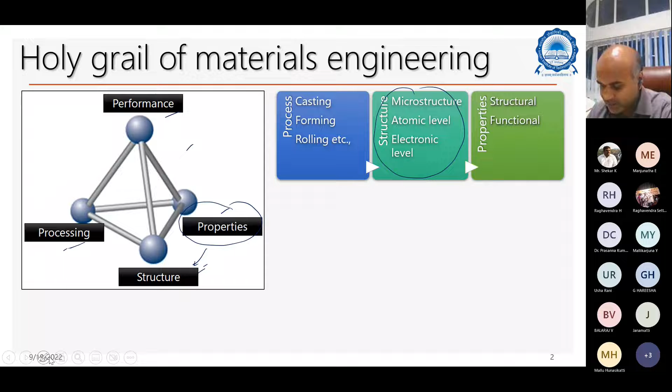What I mean to say is that when I say microstructure, the objective of materials engineers is to get a broad hold of this understanding - this tetrad. Typically mechanical engineers, material science engineers, or design engineers want to have a detailed hold on this materials tetrad, so they'll be able to design new materials and so on.

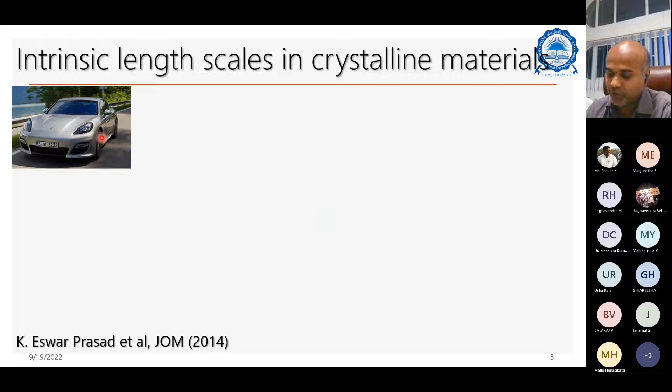So if we look at the intrinsic length scales of the material - let's say you're talking about an Audi or a car, like a Porsche, and then you talk about the cylinder block, cylinder head, crank casing, or whatever different components you can take out of it. This is what you typically look at in a macroscopic sense.

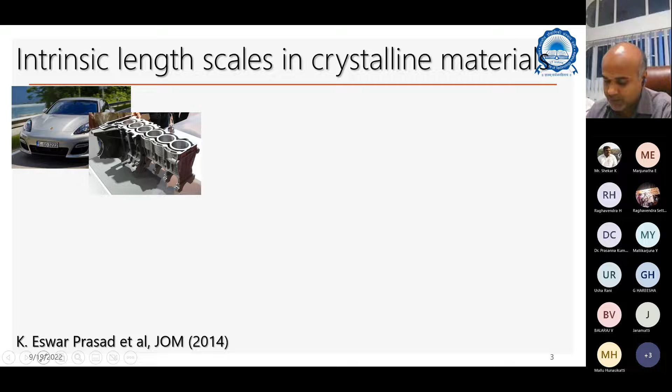When I say dig deeper into a small region of this vehicle, this engine component, and look at it under an optical microscope by using certain operations called metallographic sample preparation - which involves polishing followed by etching - what you see are different features which you could not see with the naked eye.

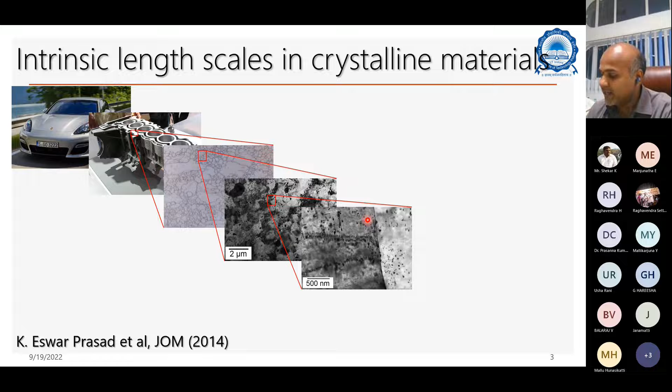If we dig deeper further, coming down from 2 microns to 500 nanometers - one order of magnitude lower - I can see a clear grain boundary, and I can also see certain features important for mechanical properties called dislocations, which are one-dimensional defects in materials. Dislocations can get blocked at the boundary to enhance the strength of the material - this is called the grain boundary strengthening mechanism.

You can further see that these boundaries are still there, and the particles appear bigger and bigger - not because they've actually grown, but because you're magnifying the zone, which is why you see a bigger apparent size of particles. This image is taken using a technique called transmission electron microscope.

In a nutshell, what I want to say is whatever alloying elements you're adding—let's say nickel and chromium to a steel—what does the nickel do? Nickel increases the strength of the material, and chromium increases the corrosion resistance. What exactly they do is sit inside certain specific regions of the structure, and they improve certain mechanical properties.

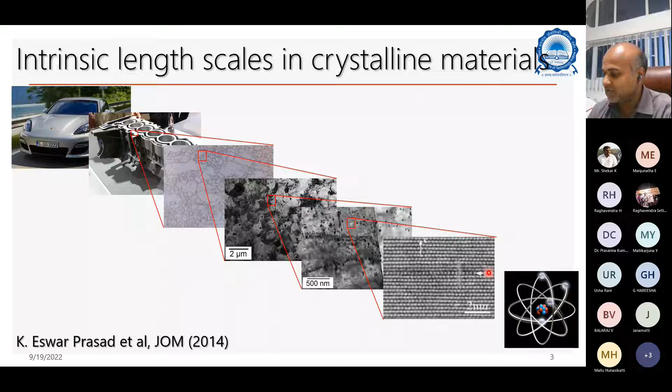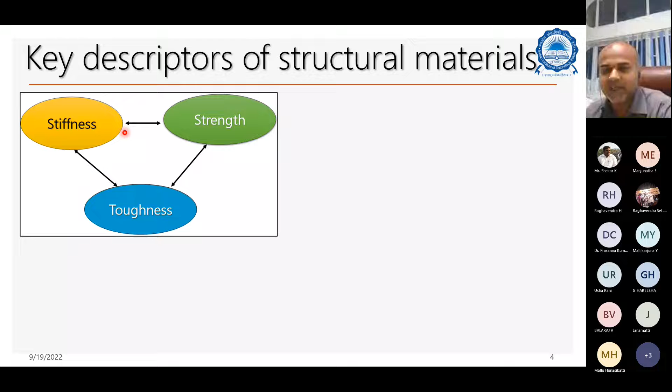So if you look at the key descriptors of a structural material, there are stiffness, strength, and toughness. These are the three important properties we always work on. All mechanical engineers or design engineers work to increase the strength of the material, and also to increase the toughness of the material.

Toughness means, for any critical component, you want the fracture toughness to be very high. But let's say you talk about a typical concrete pillar—you don't require toughness, you require very high strength for that, so it doesn't exhibit any plasticity.

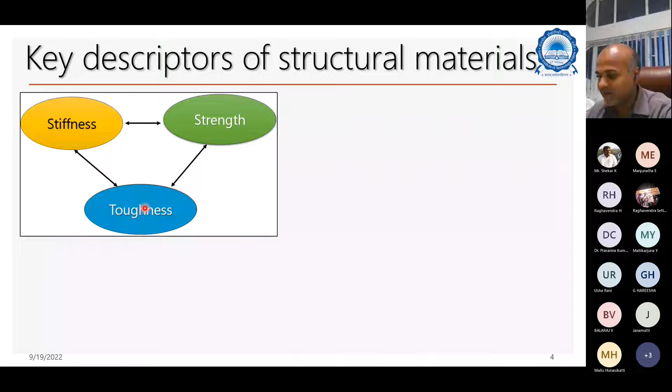In conventional materials, there's enough theory proposed and enough work done to understand how you improve the strength and how you improve the toughness. Again, this is done by processing, by certain processing methods.

What I'm talking about could be strain hardening—you take a material, you beat it extensively, and then it becomes harder and harder. That is called strain hardening.

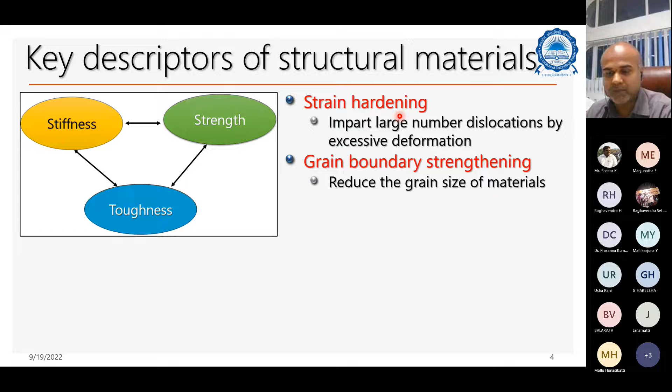What I'm saying is you cannot do this with additively manufactured alloys right now, because you're directly making the end component. That's why you have to figure out how to incorporate these strengthening mechanisms into additively manufactured alloys—this is a critical problem people are working on right now.

And grain boundary strengthening, as I showed you before—decreasing the grain size will impede the motion of these dislocations and affects the strength of the material. That's where nanocrystalline materials become very popular, as opposed to microcrystalline or millimeter-scale materials.

In nanocrystalline materials, you have a large number of grain boundaries for a given area, and these grain boundaries impede the dislocations. That's why they increase the strength of the materials. That's typical grain boundary strengthening.

Most of you would have heard about Hall-Petch strengthening. It is another term that's been coined for grain boundary strengthening.

And solid solution strengthening—this is what you're talking about. Let's say you add certain alloying elements, and these deliberately get seated in certain places, which is processed by rod processing or heat treatment processes. Then you can increase the strength of the material.

That's typically done in conventional subtractive manufacturing components, where you do all these operations and at the end machine it to make a finished product. Whereas in additive manufacturing, you start with the product, so you cannot do any of this.

Except that people are working on how to incorporate it through certain hot pressing methods or heat treatment methods—how you can post-process these additively manufactured products to improve these properties and so on and so forth.

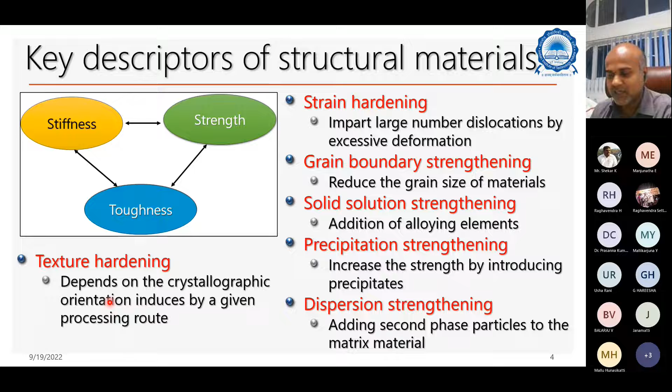Dispersion strengthening is another mechanism, mostly used by people working in dynamic energy applications. This is called texture hardening, another mechanism by which the strength of the material is improved.

So what I mean to say is that these are methods that have been in practice for more than a century, how you can increase the strength of the material, even though the mechanism has been understood only lately.

All these process methods are done before making the final component itself. So look at this, the process flow of subtractive manufacturing, SM. You have melting and casting of the alloy, and you have wrought processing.

Wrought processing is also a very important processing step in subtractive manufacturing, which we'll discuss in a few slides to set the ground for the challenges faced by people working on additive manufacturing processes.

After wrought processing, people do heat treatment. Most of you would have seen normalizing, annealing, and so on and so forth. All of these are called heat treatment processes.

And followed by you machine the component to the desired shape, and then the finishing operation. The finishing operations could be shot peening, or any other painting and coating.

If you go back to additive manufacturing, the most important part here is powder making. We'll stress upon powder making in today's lecture, as it's a very important process which dictates the quality of your additive manufactured product.

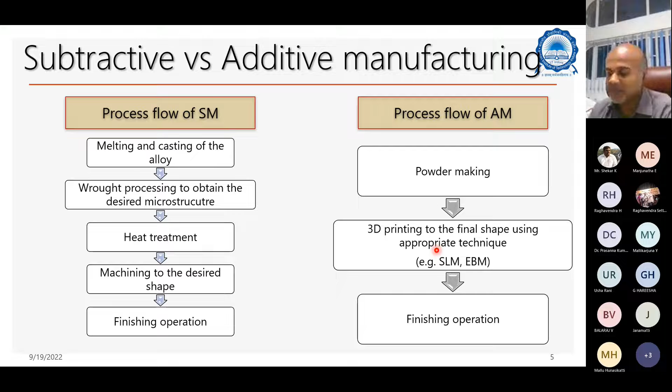Then the traditional understanding we have, how can you translate that to additive manufacturing, is a challenging process. If you look at subtractive manufacturing, standard thermomechanical processing windows have been developed. I'll briefly touch upon these processing windows in subsequent slides.

This has been in practice for quite a long time to obtain the desired microstructure. This is very important, to obtain the desired microstructure, unlike other materials, additive manufacturing material, which dictates the mechanical properties.

Most AM studies are focused on obtaining a microstructure similar to wrought alloys, because whenever you are trying to convince an aerospace engineer, you say the microstructure made through additive manufacturing is similar to that of subtractive manufacturing, then there's a chance of convincing them.

Despite that, towards the end, if time permits, we'll see a case study by the aerospace industry where there is a critical issue - people are not trusting some additive manufacturing products because there are still many things to be understood. Commercial industries are very conservative, hence they do not take the risk of directly replacing wrought alloys with AM alloys. We'll see this at the end if time permits.

The most important component here: conventional bulk manufacturing methods like casting, look at the cooling rates. Whenever you take the liquid metal and try to cool it down to room temperature, the cooling rate is very low, in fact at 10 power 0 to 10 power 2, around 100 K per second, which is pretty low.

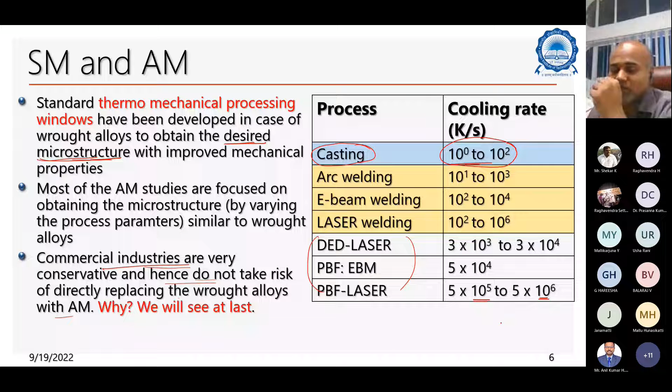In slow cooking, you're actually under equilibrium conditions, so whatever you're cooking soaks up well. Whereas in fast cooking, it doesn't soak up well - the surface gets softer but the core still gets harder.

So what happens is that whenever you're cooling a material, you have to ensure that the temperature is uniformly cooled throughout, so that the properties at every point should be the same. That's the objective of any engineer.

Since in casting this isn't achieved because of the cooling rates, even at cooling rates of 10 power 2, you generally do a process called wrought processing.

The wrought processing could be a forging operation, what you typically see in industry. I think you're going to visit Jindal as well - I've seen one of your schedules for next week. So there you tend to look at many of these forging operations or wrought processing operations of steels.

And then rolling operation, which most of you know, where you take the material to high temperatures in both cases, and then forge it or roll it to obtain the desired microstructure.

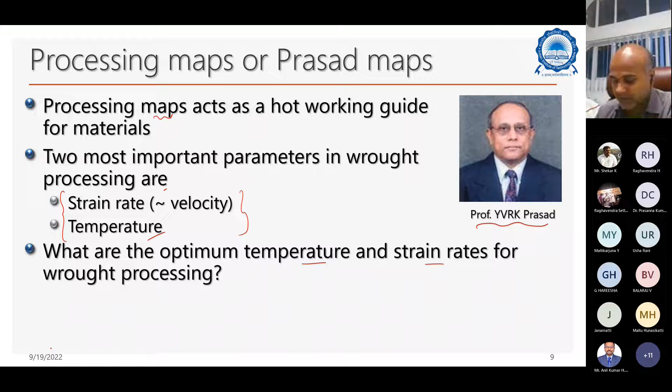So at what temperature, if this is a steel, should I forge it? Let's say - is 1000 enough, or is 2000 enough, or is 1200 enough.

Which temperature should I forge at? There's a melting temperature, beyond the liquidus temperature, 2000 or so. I'm talking about 1200 or 1500. Which temperature should I forge at?

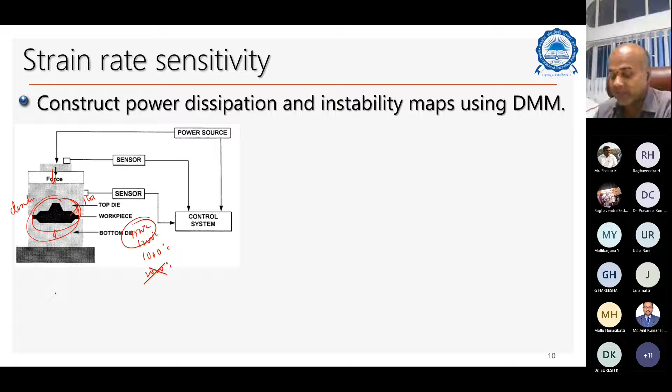Similarly, what rate should I forge at? At what velocity should I hit this? The velocity is one way related to the strain rate. The velocity divided by the length of the component gives you the strain rate. Velocity and strain rate are analogous to each other.

Typically, what people do is construct certain maps using dynamic materials modeling to arrive at rules: what is the optimum temperature and what is the optimum strain rate that a material should be deformed or wrought processed at, so as to arrive at a desired microstructure.

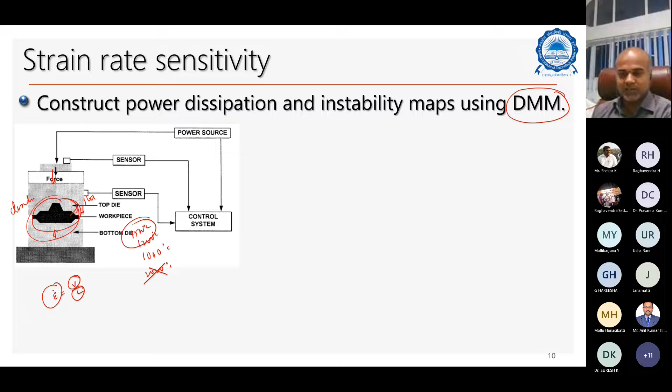So look at it here. What people do is take a small sample, a piece like this, and deform the sample at different temperatures. Let's say these are temperatures 200, 250, 300, 350, 400, 450, 500, 550, and 600. These are different temperature rates you're trying to do that at.

And then these are the different strain rates. This corresponds to certain velocities. V1, V2, V3 — these are different velocities in increasing order.

So what happens is that when you do that, materials tend to exhibit a property called strain rate sensitivity. The moment you increase the hitting rate, the material exhibits a higher flow stress, because of the character of the dislocations — that is what the mechanisms tell us.

So at a given temperature, if you increase the velocity, your flow stress goes up. The flow stress increases with strain rate. Sigma increases as epsilon dot increases. Epsilon dot means the velocity I'm talking about.

So what Professor Prasad has done is derive and compute, from the dynamic material modeling — I'm not going much deeper into that — the efficiency of power dissipation. If you talk about any method or process...

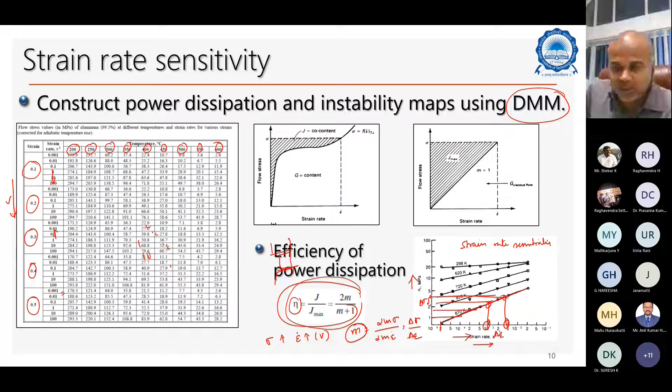From the strain rate sensitivity, you should be able to calculate the efficiency of power dissipation — how much energy the material has dissipated. If it is dissipated more to the surroundings, less is consumed within itself; if less is dissipated, more is consumed internally, causing internal microstructural changes, which you will see in the next slide.

Similarly, there are certain instability parameters. So efficiency of power dissipation is one thing, and what changes the material undergoes when it consumes this energy is another — it could be a good change or a bad change. If it's a good change, it gives a homogeneous microstructure; if bad, it gives a heterogeneous microstructure.

So similarly, you construct a power dissipation map — these maps can be generated, and an ASM handbook is also available on this. You also generate a map called the instability map. Superimposing one on top of the other gives you this kind of processing map. This processing map tells you something, but it's a simple concept — you don't have to worry too much about it.

So what happens is that if your temperature is this, and if your strain rate is this - this is the range of temperature and range of strain rates or velocities I'm working with - then you'll get a very good microstructure in the material. I'll show you what is good microstructure and what is bad microstructure in the next slide.

Suppose your temperature is this, your strain rate is this - this is your window. Then you get a very bad microstructure. Bad microstructure means the material properties are highly non-uniform. You don't want any operation to be carried out in this domain.

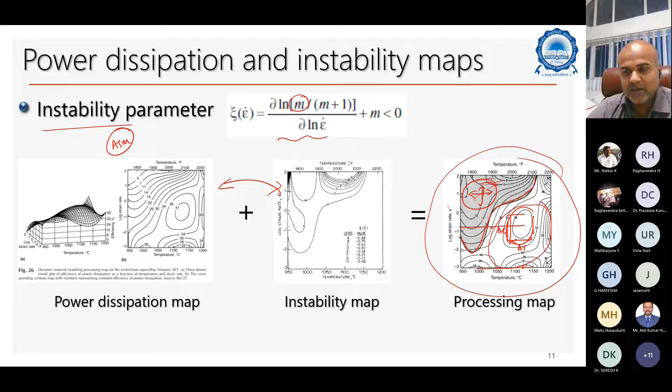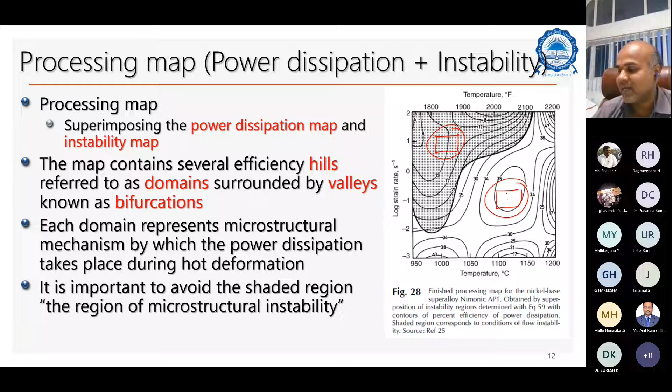So typically this is what I'm talking about, this is what you're trying to avoid. Let me go back in detail. What happens when you do a process in this region - how does the microstructure look like? And when you do the operation in this other region, how does the microstructure look like? The difference in microstructure between this region and this region - stable and unstable mechanism I'm talking about.

So this is one such processing map developed for AZ31 alloy. AZ31 is a magnesium, aluminum, zinc alloy - magnesium with 3% aluminum and 1% zinc.

When you do this processing operation, this is the instability zone - you want to avoid operating in this zone. You can do it here, you can do it here, you cannot do it here, you can do it here, you can do it here. So I'm talking about this temperature-strain rate window you can operate in.

Let's take one such alloy, AZ31 alloy. I'm doing this operation at 350 and 550 degrees centigrade - two temperatures. At 350 degrees centigrade, I'm using two different velocities, striking this sample kept in the material, in between the two anvils.

So when you do that at 0.001 at domain 1, you get a microstructure like this. I'm pretty sure you'll be able to see this microstructure - you see very homogeneous grains. All the grains are of equilibrium, equisized grains. The grain size is slightly bigger, we're talking about 20 microns here, but you get a very homogenized grain shape.

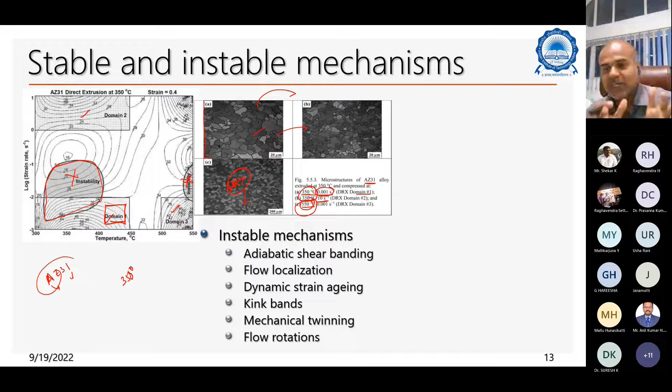There's a reason I'm saying this - don't get confused. I wanted to start with additive manufacturing, but I want to set the tone for AM. That's why I'm actually doing all this.

When you do this unstable mechanism, these are not the desirable microstructures you need. In a conventional subtractive manufacturing setup, people have known the rules for centuries - what temperature and what strain rate to work at to arrive at a desired microstructure. The person working on the shop floor only knows he needs to operate at this temperature, this strain rate, but why he has to operate at that temperature - this is what will tell us, why he has to operate at that particular temperature range or strain rate range.

So if you look at it here, undesirable microstructure - let's say I've taken another material which I'm operating in this zone. What I get is a microstructure like this. The same material, if done in a good domain free from unstable regions, you get a very good microstructure. But in a domain that falls in the instability zone, you get a microstructure like this.

Similarly, you get a microstructure like this in this domain, at very high rates or something. These are very undesirable microstructures. You don't want any of your engineering component to have this, right?

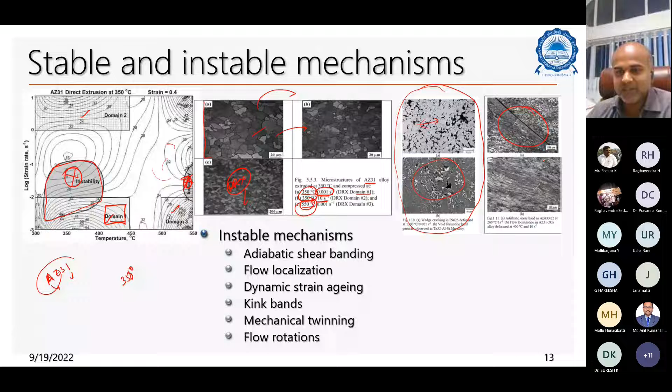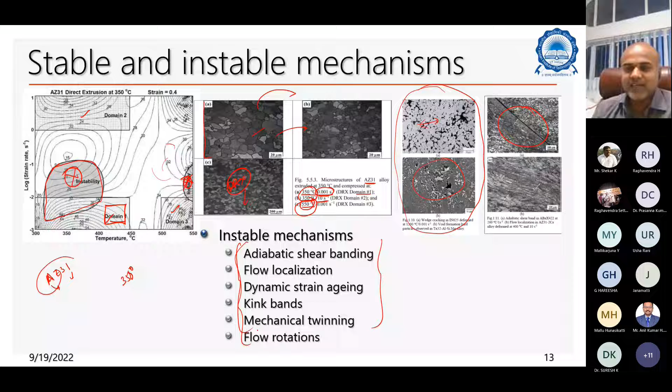So there are regions where the material has certain pores, wedge crackings, adiabatic shear bands, or flow localizations. So the initial processing of the material is not good. By processing, it could be wrought processing or cast processing. Then you have to change the entire batch, otherwise the metal cannot sustain. So these are all the undesirable mechanisms you want to avoid whenever you process it. That's why you have to optimize the temperature and strain rate space so that you will get a desirable microstructure.

Very rough surface, which is undesirable for any engineer to look into, because it actually creates a lot of fatigue problems. I think Professor Jayaganthan would have discussed the fatigue of additive manufacturing alloys yesterday. Whenever you see any surface roughness, especially in the additive manufacturing product, if you don't properly treat the surface, you're going to end up with very poor fatigue properties.

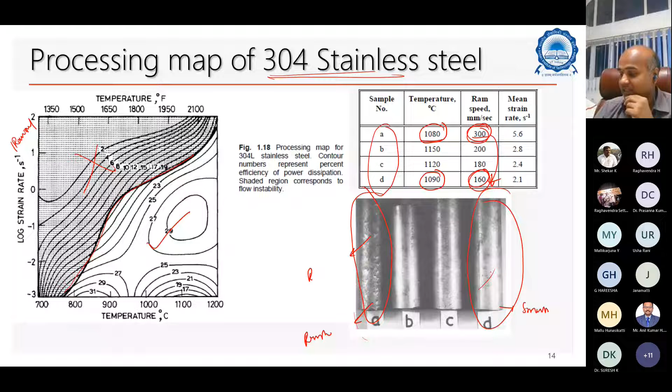Whereas the one which you processed properly actually gives you a better microstructure. So this comes down to what the challenges ahead are. In traditional methods, in a nutshell, you have very sound processing methods. You know at what temperatures to operate, at what strain rates to press, at what velocities you have to compress the specimen to make the component. They're all properly laid out, the rules are pretty laid.

So do we have such rules for additively manufactured products? Since we know that you're directly avoiding all these processing steps and reaching the end product in one go, you're avoiding all these methods I'm talking about. So what microstructures do you get? Is it desirable or undesirable? Otherwise, can we develop a processing map for additively manufactured products?

In conventional subtractive manufacturing, you have temperature and strain rate to tweak in between those two to get the microstructure. But in additive manufacturing process, you don't have any of those. What you ideally have is a bunch of parameters I'm going to talk about in the next slide, and those parameters you have to tweak. Unless you properly optimize those parameters, you will not get a desirable microstructure. And if you don't get a desirable microstructure, your properties won't be good, and the performance of this additively manufactured component cannot be on par with the subtractively manufactured product. That's very important, right?

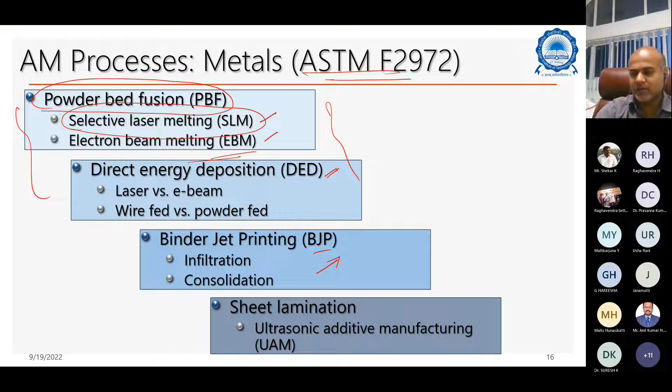What matters is at what rate, at what thickness you are supplying powder, what is the laser beam intensity, what are the speeds, the spot size, the scanning parameters, and scanning energy being applied. These are the processing parameters in SLM. Also, particle size, particle distribution, particle surface roughness, and quality of the particles are all properties that affect the quality of the product.

In electron beam, since the electron beam is very sensitive, you do it in a high vacuum process. Whereas in DED, you can do it with wire fed or powder fed. Both of them are good.

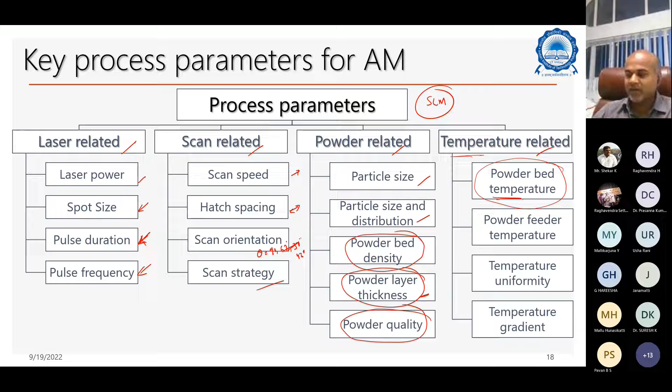Dr. Amit is going to talk about heat flow and fluid flow in additively manufactured products. I think he'll be stressing much on this hopefully in the next week.

Powder feeder temperature - what is the feeder? What feeder are you using? What is the temperature of the feeder? Because if the temperature of the feeder comes down, whatever heat you put in, you have to heat the feeder. Otherwise you can't put cold powder on a hot plate. You're going to have some issues there as well.

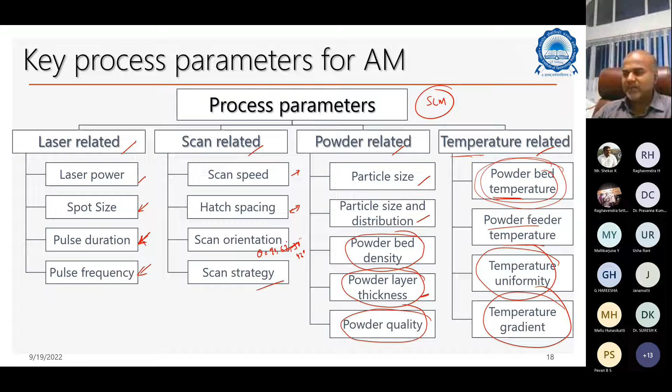And uniformity in the temperature and temperature gradient - what is the temperature uniformity in the plane? What is the temperature along the thickness, the gradient in the temperature? So these are all the ones which affect the key process parameters needed for additively manufactured products in an SLM process. So we talked about process parameters.

These process parameters will affect the end product - that could be porosity. If the process parameters discussed before are not optimally used in processing these components, you're going to end up with porosity, cracking, balling, and delamination.

This mostly happens when there is a differential thermal gradient between one layer and another, and also residual stresses. Residual stress is another key problem in additively manufactured components - that's why people have to anneal it to remove the residual stresses. And there's substrate adherence and warping - that is dictated by the backplate material, how easily you can pull up the product deposited on it.

And then there are certain microstructural controls that actually affect things like material chemistry, melting, melt pool geometry, solidification, microstructure evolution, cooling down, and grain size orientation.

We discussed about this - and thermal post-processing. What is the post-processing you have to employ? It could be heat treatment. Sometimes people use shot peening followed by heat treatment. So those are what I'm talking about here, because eventually they control the mechanical properties of the material.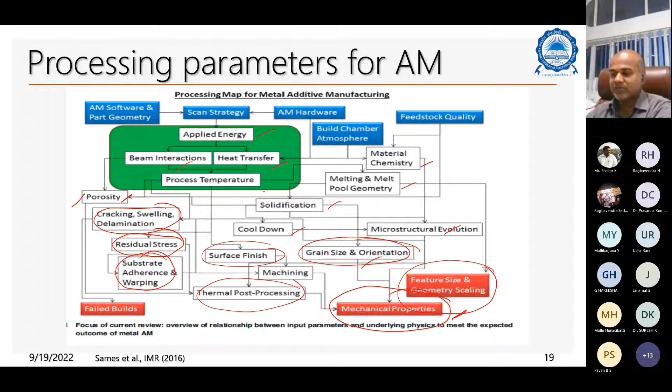And feature size and geometry scaling - these are the important process parameters that affect whether there are defects in additively manufactured products or microstructural features in AM components. Again: applied energy, beam interaction, heat transfer, process temperature - these are all factors.

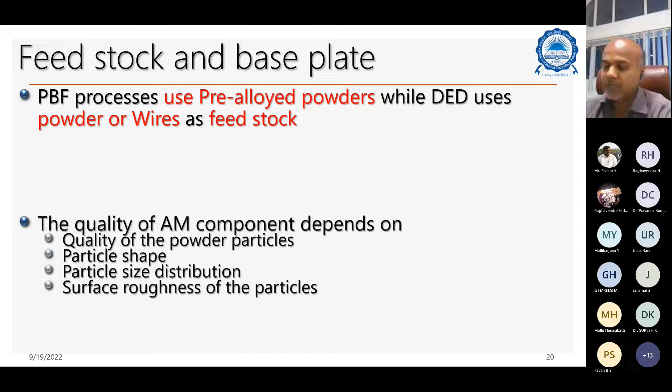In feedstock and base plate - so in PBF, generally powder bed fusion uses pre-alloyed powders, while DED uses powders or wires as feedstock. As I told you, one key advantage with DED is that you're using powders of different compositions, and you can put different ones in.

So you can deposit, let's say, an aluminum and nickel component. In the first layer, aluminum 80, nickel 20. Second layer, aluminum 60, nickel 40. Third layer, aluminum 20, nickel 80. This you can do in a DED process - functionally you can grade them.

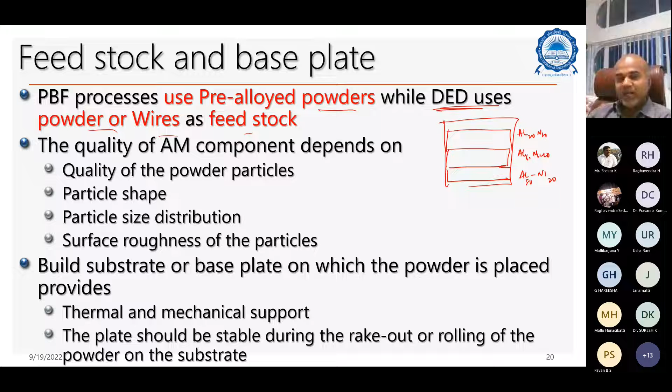So whenever you want a very hard surface with a tough core - case hardened material - you can employ this kind of technique. You have microstructurally, not compositionally, functionally graded components. You can use it in a DED process.

Whereas in PBF processes like SLM and EBM, we don't have this provision - you have to use the same uniform powder to build the component. That's typically what we're talking about.

Quality of the AM component depends on the quality of the powder particles - particle shape, particle distribution, surface, as I told before. And the build base plate on which the powder is deposited provides thermal support, because it's actually supporting the build.

Sometimes what happens is you're trying to deposit Ti64, titanium 6 aluminum 4 vanadium alloy, which is a workhorse in titanium aerospace material. So you have to use a stainless steel base plate.

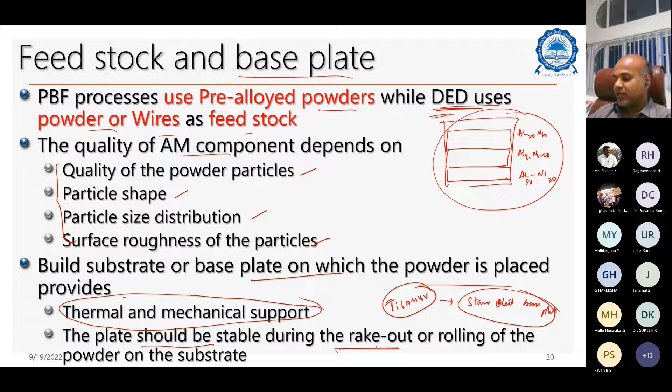Okay, so you can deposit, otherwise you deposit it on another plate. It's very difficult for you to remove the component. That also depends on what feedstock you're using, what component or alloy you're depositing, so correspondingly you choose an appropriate base plate. That's what typically people do. It should be stable and it should rake out - that is raking out or rolling of the powder on the substrate. It should be easily removable.

Let me share this again. So what you're saying is that you're putting the entire rake, the surrounding, whatever is there, right? Yes, sir. This powder you cannot use it.

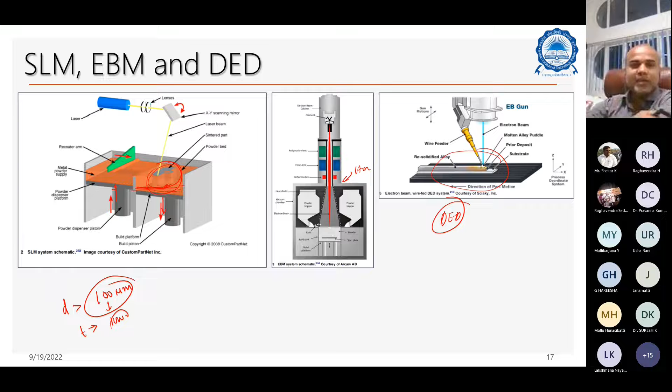The heat felt by the powder, actually you have to get it waste only. That's a problem actually. In fact, that is why AM, though they say it's an alternative method, still cost is an issue here.

But as you told, the temperature, especially when you're trying to optimize the temperature wise, still there are certain challenges. Especially the microstructure that you get in AM is completely different when you do it at high temperatures. So you have to use certain post processing operations like annealing treatments and heat treatments to avoid it, but still you're far from the microstructure that you get from wrought processing only.

Okay sir, thank you. Any other participants would like to ask the question? Sir, in fact, the session is very interesting. Thank you.

So the objective of me putting the subtractive manufacturing processes is that most of the processing map concept is not being taught anywhere, and many of the microstructural people who work in hardcore microstructures for industry, the first thing they have to do is develop a processing map for the given material. Then only you tell them these are the range of windows for temperature and strain rate windows.

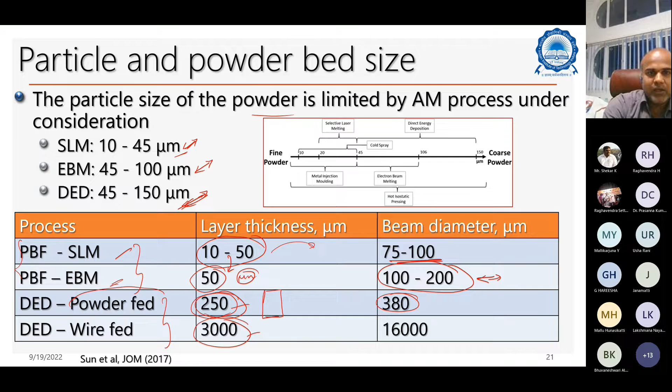So go back to the powder preparation method. Atomization is the powder preparation method most extensively used to make powders. What is atomization? You take a liquid - you melt the material, a liquid alloy of a given composition, whether it's Ti64 or any other alloy, stainless steel or anything. You melt it and allow it to fall through a small orifice from the ladle.

As soon as it comes out, you apply a very intense gas or fluid jet - a high velocity jet of air, nitrogen, argon, or helium. This fragments the droplets penetrating through the orifice into very fine powders, which are then collected in a silo and separated.

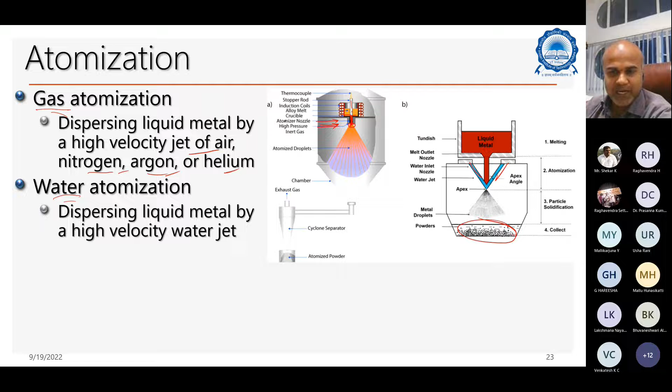So what conventionally you do, instead of casting, is melt it and fragment it into very fine particles using a jet, which could be gas - nitrogen, argon, or helium - or it could be water. Sometimes high-impingement water is used in what's called the water jet process, where particles are collected. Sometimes plasma atomization is used as well, which is slightly more expensive.

If we look at the typical particle size distribution comparing the two - these are water jet atomized particles, and these are gas atomized particles. The water jet ones are very randomly non-uniform, with no sphericity at all.

Particles are pretty randomly distributed, and here you look, particles are slightly rounded shape. This is what you actually get with gas atomization.

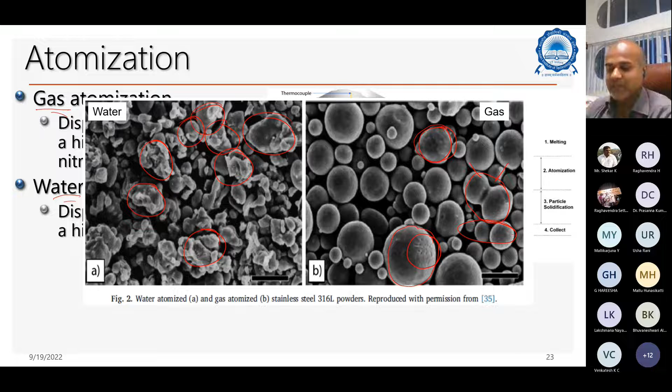What you can see is that some particles are still irregularly shaped. This is not a sphere or something. And then again there are some particles which are unable to separate, and you can see there is certain surface roughness associated with these particles. Particles are quite rough, but the quality of the particles is much better than the water atomized particles.

Look at the quality of the particles here. So this is the gas atomized particles. I'm doing a 2D image of this here. You see these are the porosities that got entrapped due to gas entrapment.

Gas entrapment leads to this porosity in the particles, and it gets translated to the final product as well. That's why. So these porosities you see in additively manufactured components, one source could be this powder, the porosity of the powder itself. And these are called satellites.

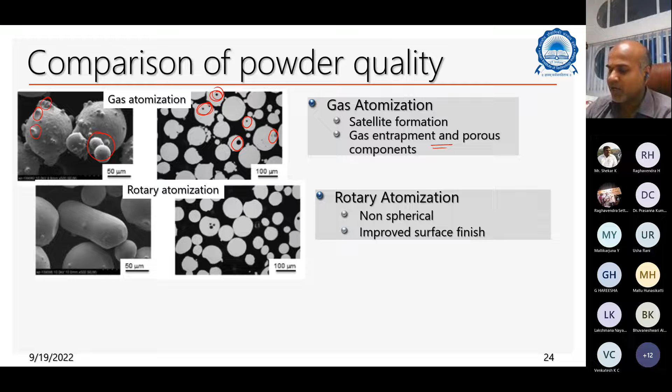Typically, the name itself indicates the satellites get stuck to the bigger particles during atomization. This is called rotary atomization. In rotary atomization, you are trying to rotate it, and then you are still using a gas as the atomizer. So it is non-spherical. Some particles are long, and then you still see very small porosity here. But surface finish is slightly better here because you're using a rotary kind of atomization.

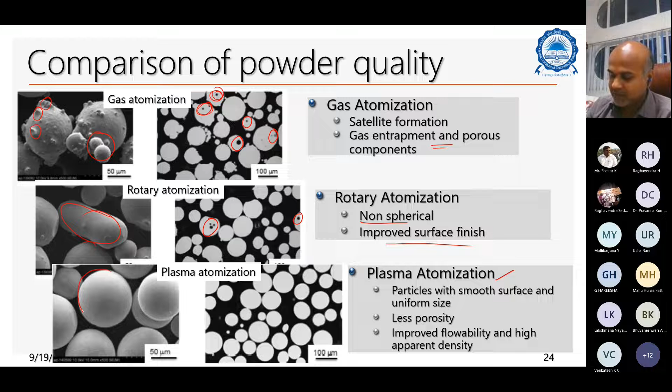The best atomization powders, what you get, is the plasma atomization. With plasma atomization, you get very, very rounded particles, fantastically rounded particles. And then you see that most of them actually have a uniform size, with no porosity, less porosity or no porosity.

At least this image shows that there is no porosity, but you cannot claim that based on this particular image. The porosity is just very less. And because of this, the flowability is very good. When the flowability is good, the particles easily flow through the hose, and then they can also have a good bonding ability between them. That's very important.

So the plasma atomization gives you the best powder quality. That's why these powders are also expensive. In fact, these powders, if you look at the price, I think half a kg or 2 kg, I bought it for around 25,000 rupees or something. The other ones, not these ones, the other ones.

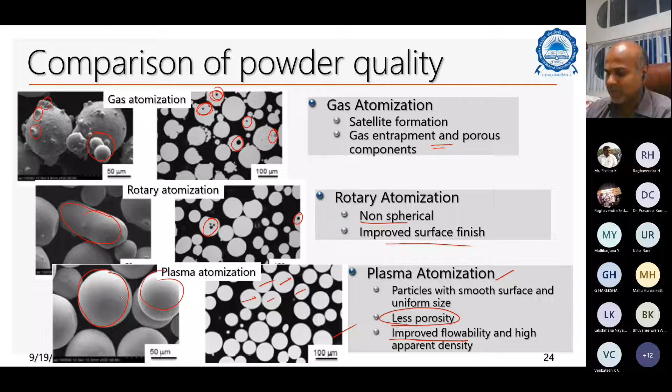Somebody was asking whether the laser heats up, how the intensity looks like or something. Sometimes your laser power is very strong. It actually ejects certain particles as well, and it leads to porosity formation as well.

And this particle ejection, there is a convection transfer that happens with the liquid metal pool. And the laser imparts high energy on the powder bed via photons, and therefore the absorptivity or reflectivity of the powder material is an important parameter that decides the laser intensity. That's what the laser intensity is, as we're talking about.

So what is the bed thickness and what is the powder material size? These are the ones which actually dictate the laser intensity you're talking about. And particle size distribution determines the key laser power.

Smoking - these are the ones talking about SLM. When you do about E-beam, there is a term called smoking. So since E-beam uses a high impinge, electrons are impinging on the sample surface, and there is an electron transfer that takes place between the beam and the sample. So what this actually does is lead to a kind of bulk displacement of the powder. It's also known as smoking.

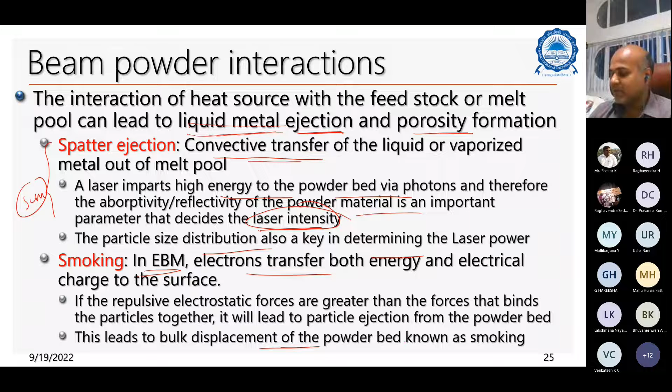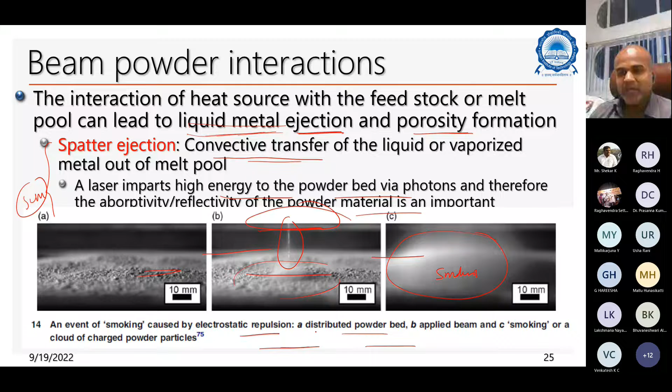So this is what exactly happens. This is an electron beam which is passing through the material, and if you look at this region, this is initially, and it actually gets completely smoked out. It's called smoking. Smoking is also not a good thing because it leads to certain kind of defects in the additively manufactured product. So it's electrostatic repulsion. These are some of the beam powder interactions which also lead to certain kind of porosity.

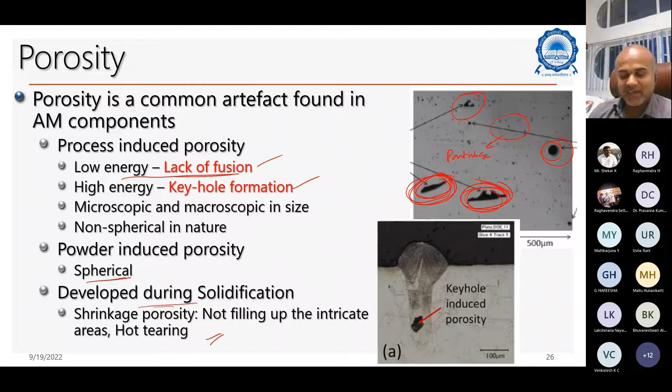Powder induced porosity is always spherical, whereas the other porosity that happens during solidification leads to shrinkage porosity. The bigger ones develop due to shrinkage that happens between successive layers, not filling the intricate area, which is hard to fill. This is one example of that, keyhole induced porosity, which is an example of the shrinkage porosity developed during solidification.

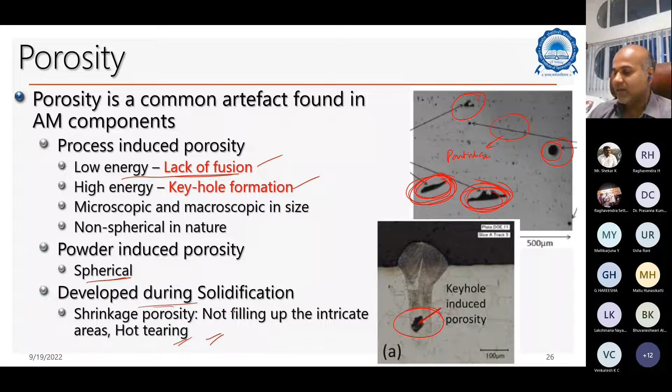Since we're talking about layer by layer deposition, there is always a temperature gradient between this layer and the next. This leads to some kind of differential solidification shrinkage and causes certain cracking or porosity in the sample itself. That's one of the reasons you see bigger porosity as well.

So, scan strategy. We talked about scan strategy before, and it is a very important factor in additively manufactured products. We'll see in the subsequent slide how the scan strategy influences the microstructure. There are certain strategies you can use. If you're talking about a laser here, and this is your component, you travel once like this.

This is called unidirectional fill, this is bidirectional fill, and this is called island scanning. Island scanning is where you divide the entire square into multiple squares, and then you adopt multiple scanning like this, so that each of them is 90 degrees or some other angle apart from each other. This is one of the scan strategies we employ to develop island scanning.

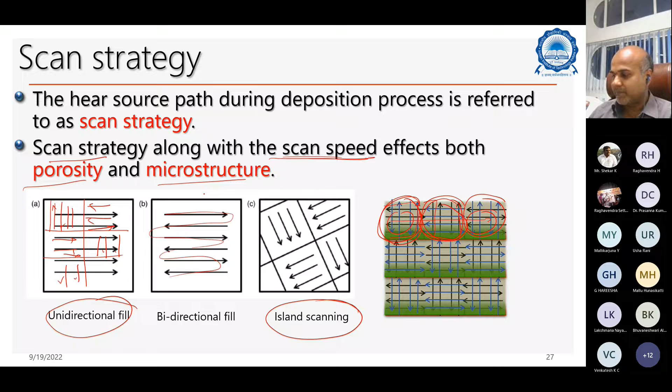Scan strategy and scan speed: the scan speed affects both porosity and microstructure, which we'll see in subsequent slides. Looking at various scan strategies and scan speeds, a very high speed with alternating scanning leads to very high porosity, and very low speed with alternating also leads to issues. Alternating scan strategy is typically avoided.

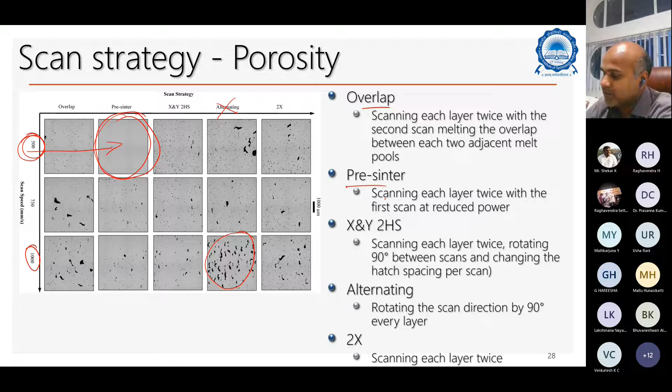Alternating scan strategy is always avoided. One advantage of avoiding it is that you can pre-sinter the particles. Before putting the particles inside the powder bed, you pre-sinter them and then put them inside the bed, so you get a better result without any porosity. A low scan speed always gives you a better product with less porosity. This is what's called overlap and pre-sinter.

And the other issue is delamination cracking. So, regarding this, a question came up about what could be the optimum layer thickness and what could be the laser intensity.

If your laser intensity is low and your powder thickness is significantly high, what it does is that it cannot melt these layers. So, the powder layer thickness should be commensurate with the laser intensity, or the power you're using, for the additively manufactured product.

If they are not concomitant to each other, then you end up with incomplete melting of the powder layers. Incomplete melting of the powder layers leads to certain kind of cracking at the junctions. This is one layer and this is one layer, and the material is actually cracked between these two. That is delamination, where it gets completely delaminated.

Another type is solidification cracking. As I told before, this happens if you have a wide mushy zone. If you're using certain alloying elements, let's say this is one particular material with a narrow mushy zone, and another material has a wide mushy zone. If the liquidus and solidus region is pretty significant, that's called a wide mushy zone material, with large liquidus lines, especially for Inconel 718 and these kinds of super alloys.

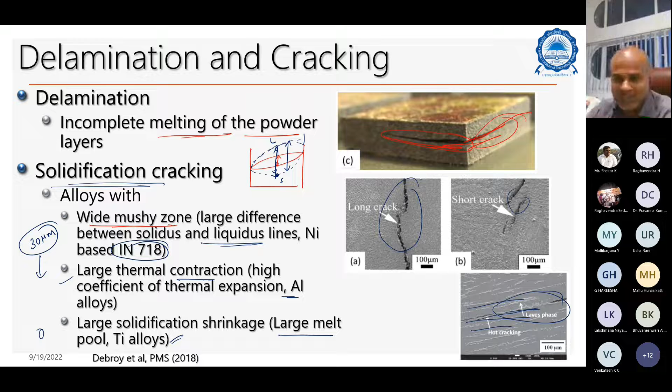This is something you have to work out. One solution is to minimize the powder layer thickness. If you're using Inconel, it's 30 microns, but you cannot use the same thickness for aluminum alloys, or the same thickness for titanium alloys. The thickness of the layer depends on what alloy system you're using and what laser power you're using - that's another important factor.

So when we talk about metals and alloys for AM, this list is not exhaustive - there are a lot of new additions coming now. These are the commercially used metallic alloys: stainless steels, titanium alloys, aluminum alloys, nickel-based super alloys, tool steels, and cobalt chromium alloys, all manufactured through powder bed fusion.

For titanium alloys, Ti-6-4 is very popular now, and we're trying to look at alloy Ti-6242 which has niobium and other elements, not yet available here - we're trying to get it from abroad. Even then, they also have to optimize the process parameters, because they have to make the alloy, atomize this composition, and look at the powder particle size and composition distribution before they can sell it.

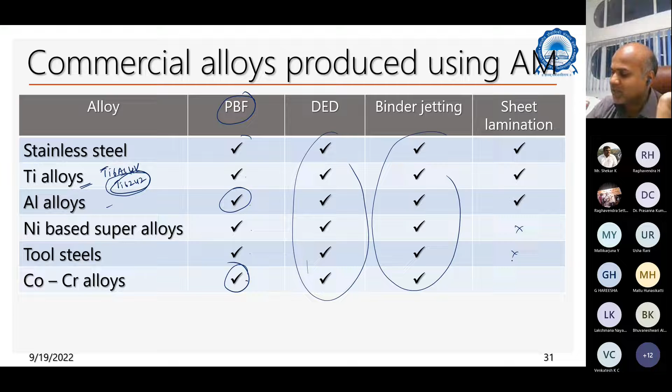Aluminum alloys - many are actually made through powder bed fusion now. Nickel-based super alloys, like IN 718. When I say super alloys, not all gamma-prime super alloys - some compositions are already being made. Tool steels and cobalt chromium alloys are all made too. These alloys can be made through binder jetting, DED, and PBF, but sheet lamination, and these three are still the most popularly made.

Let's look at the microstructure - we talked about microstructures in the beginning. Starting with wrought processing alloys, engineers want to know, whenever an additively manufactured component is made, how it fares with respect to the wrought product - the microstructural differences between these two. For example, I've put a couple of microstructure comparisons here.

This is an Inconel-based 718 alloy - this is a conventionally cast material, and this is a selectively laser melted material.

Without any wrought processing, the as-cast structure microstructure looks like this. There is a delta phase, there are carbonitrides, and there is a grain boundary.

Look at the AM components. The delta phase is much more dispersed here, and the grain boundaries are also much finer. The grain size is pretty small in that case. Within the grain, you don't have any delta phases here, whereas the delta phase also appears in the grain, which is good or bad.

Once you do the experiments and understand the high temperature properties and other properties, then only you're able to see. Apparently, what I found is that the AM 718 SLM sometimes outperforms the conventional as-cast material, because this delta phase distributed within the grains will also give you certain beneficial properties for 718 material.

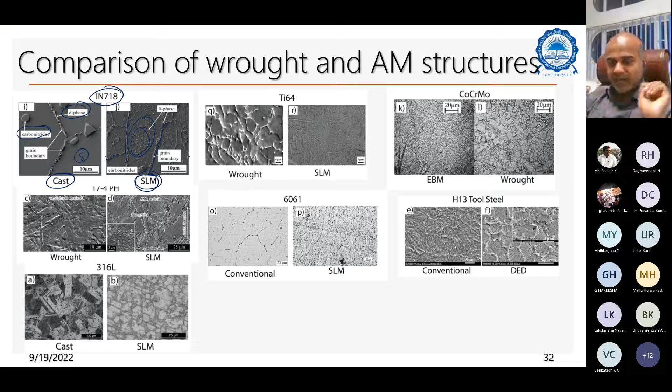That is why 718 is very widely made additively manufactured alloy. This is what we're showing, because 718 is also used in cast condition, which is why we are comparing the cast condition of 718 and SLM. Look at the Ti64.

Ti64 is titanium, 6 aluminum, and 4 vanadium. This is a widely used aerospace material because of its high specific strength. The density of this material is around 4.5, the strength is around 1,000 megapascals. Strength by density will give you the specific strength, and the specific strength of this material is very good.

Look at the wrought alloys and SLM alloys. In the wrought alloys you see proper grains and a kind of lamellar structure, which you don't see in the additively manufactured Ti64 SLM process alloy. You see very finely distributed phases here. We'll see subsequent slides, I have much more work to present on this.

What I'm talking about is you see a very fine acicular microstructure here. In the SLM process, because of the fast rapid cooling rates, you're talking about 10 power 5 K per second. Because of this, you actually create some non-equilibrium phases instead of equilibrium phases, which is sometimes beneficial for strength but very bad news for ductility or toughness.

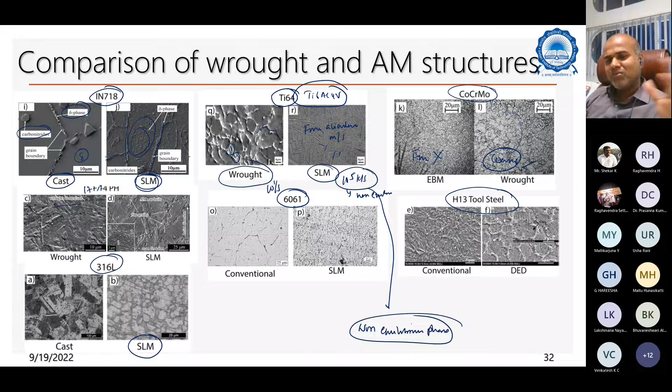That gives properties closer to the conventional cast alloys also. This is one example I'm trying to show for AISI steel, a low carbon steel.

If you look at the additively manufactured one, you see this kind of fish scale structure, which is pretty heterogeneous, right? Some grains are bigger, some grains are smaller, and they are interpenetrated into each other. When you look at the same here in the wrought product, you see a very homogeneous microstructure. In cast, you see a very big microstructure.

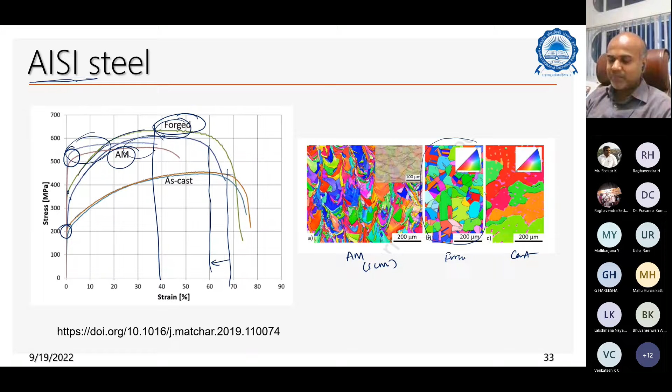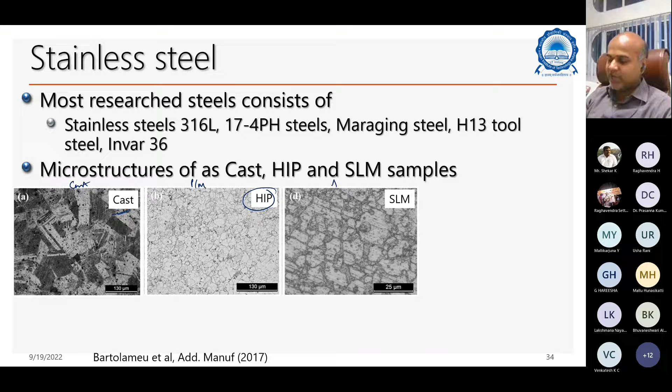17-4 PH steel, as I told here. So we're talking about three comparisons: this is the cast material, this is a hot isostatic pressed material, and this is the SLM processed material. So this is a cast route, this is a powder metallurgy route, and this is an additively manufactured route. If you look at it, the SLM processed one gives the best strength - tensile strength and yield strength are much better than this, unlike the previous AISI steel case. But ductility is again a problem here.

If we look at the XRD pattern of these three materials - SLM, HIP, and as-cast - you see that the as-cast material has more intense 111 peaks compared to these two, which shows there is a certain kind of preferred orientation or texture in that material.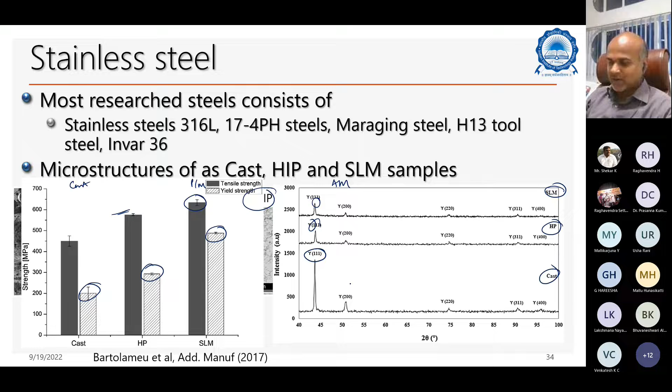Once you heat treat this after the SLM or additively manufactured 3D printing process, what happens is that you push most of the data points towards more than 15% elongation or so. Post heat treatment of aluminum alloys is found to be an effective method to increase the ductility of additively manufactured products.

Since you cannot do the same operations on this material as with conventional alloys - like using processing maps, which you don't have for this wrought processing - the only way you can tweak the microstructure is by tweaking the heat treatment cycle. And that itself involves so many parameters: what temperature you have to heat it to, what is the rate of cooling. So that has to be a proper study.

That's the reason I think a lot of people nowadays are using machine learning techniques to optimize the processing parameters for additively manufactured products. This is actually another booming area. If any of your mechanical engineering students are interested in applying machine learning, this is a very challenging area with a lot of challenges, and I think it gives them good experience as well.

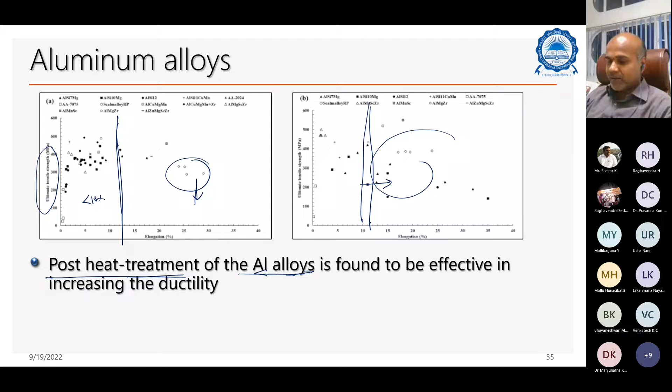Vanadium acts as a beta stabilizer. So as a result, if you look at Ti64 alloys, you can actually retain both BCC phase plus HCP phase at room temperature. This has certain advantages - very high corrosion resistance, very high creep resistance, and ductility. Generally, pure titanium at room temperature is always in the HCP phase, and at high temperature in the BCC phase. The moment you add aluminum and vanadium, you can retain both alpha plus beta at room temperature, which gives the best of both properties.

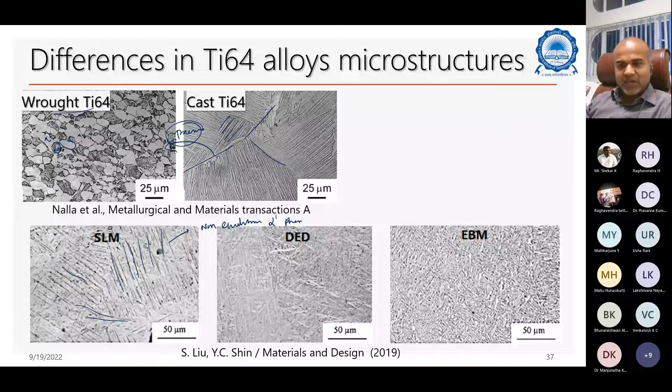So look at the microstructure here - I want you to make a cut on this. This is a microstructure using SLM with a traditional one-line scanning, zigzag scanning or something. But if you do island scanning, you see a completely different microstructure.

We don't call this a microstructure - I mean it is a microstructure, but to differentiate it from that one, we call it a mesostructure here. What you can do is actually create small blocks, where each block exhibits a different orientation, different grains.

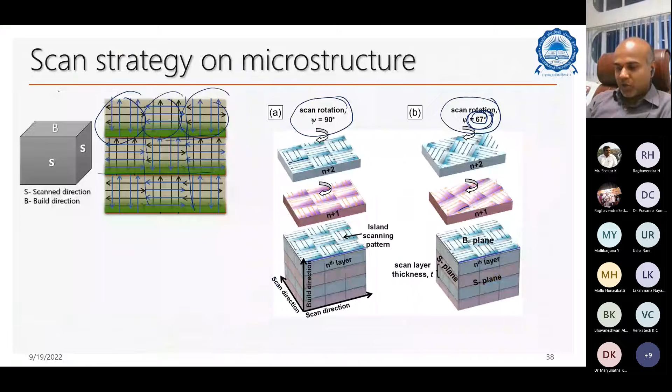By just tweaking the island scanning, you are homogenizing more or less the microstructure, which is not possible otherwise. Number two, what you are doing is creating, by just varying the scan orientation without changing the layer thickness, a completely different microstructure.

This is actually a more homogeneous microstructure - an equiaxed microstructure. This is a very unique microstructure.

So this microstructure is similar to, or more or less similar to, what people get in conventional wrought processing, because you are controlling the flow of heat as well as the anisotropy between the two layers and so on and so forth.

I'm talking about the build layer here - this is actually called the build direction, and this is the scan direction. In the scan direction, you see a completely different microstructure from the microstructure you see when you're building it.

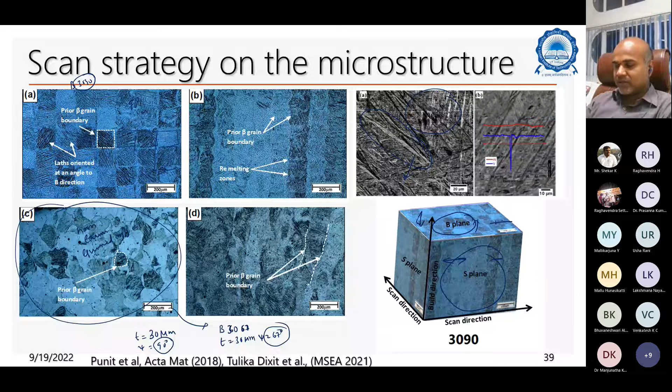The properties sometimes could be different. If you're testing a sample in this direction versus this direction, the properties of this material could be different because of the differences in the microstructure. What you see here are these kinds of features, which are actually non-equilibrium microstructures.

These are non-equilibrium phases, called alpha prime, which is good sometimes because it gives you very high strength. If you look at this, this is the B component, and this is a build direction. B stands for build direction, S stands for scan direction.

If you look at the build direction, it's giving almost 1000 megapascals, almost 1 gigapascal of strength. All materials exhibit more than 1 gigapascal. And look at the ductility, it's pretty poor. Ductility in titanium wrought alloys is typically greater than 30%, whereas here it's very poor, around 13-14%.

But what you can see is the fracture toughness, K1C. K1C fracture toughness values, you get very good values. If you look at typical K1C values for the wrought process, it will be of the order of 60 MPa root meter. That is also the same term here.

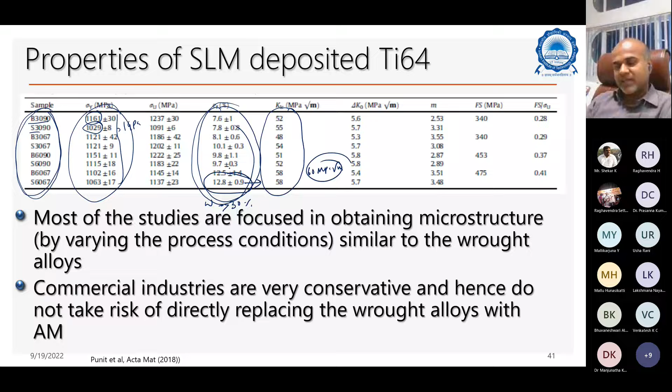So what I'm talking about is that most of the studies show that these alloys made by conventional manufacturing methods, wrought processing methods, the microstructure of these AM alloys can be varied or tweaked so they will be close to conventional microstructures, wrought process microstructures, by varying the island kind of scanning as well as the scan rotation, which is 67 degrees. Also, by proper heat treatment and post-processing treatment, it's possible to increase it further. We have not done any post-processing, but it is possible to actually increase it.

So we did a study on high strain rate deformation. We wanted to look at this because these are the alloys used in aerospace applications like landing gears, and they experience a lot of dynamic loads, high strain rate loads. We wanted to look at how these perform with respect to dynamic loads, the deformation at high rates, how strong they are at impact loading conditions.

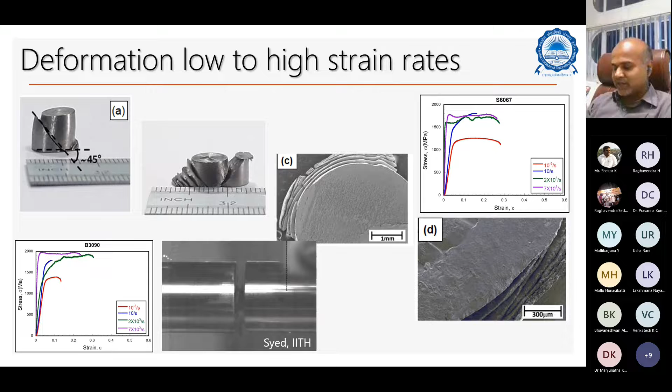So this is actually talking about that, but ductility is still an issue. Ductility is still an issue.

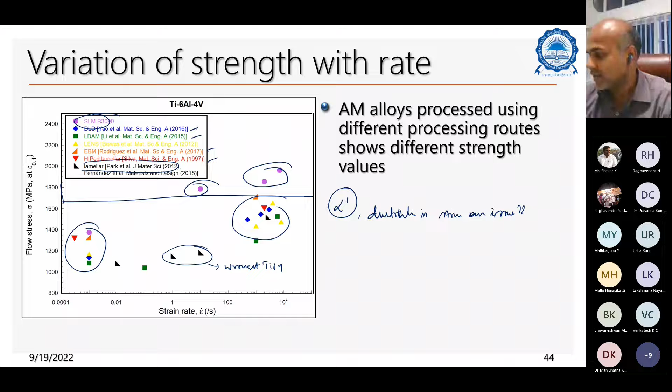I'll take some questions here and we'll go to the last topic of today: what limits the use of AM in critical engineering applications? Any questions?

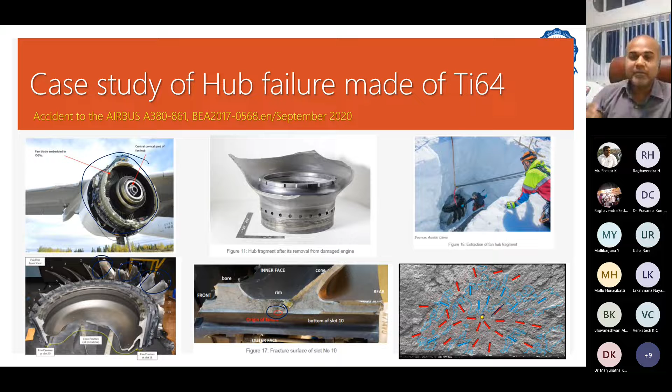So people have done some kind of microstructure analysis. As long as everything is going fine, nobody cares about microstructure, but the moment some failure happens, people dig deeper into the materials issues, because most failures happen due to some uncertainty in the materials and so forth.

This analysis was done by Pratt and Whitney, which is openly available, and what you can see is very clear serrations here. Probably yesterday you would have seen a lot of images like this. These serrations are the fatigue striations.

And then what they figured out is that they couldn't even notice this from the images alone, so they did a technique called orientation mapping. This technique is used with XRD and with EBSD, which is called electron backscatter diffraction spectroscopy.

What they found is very localized regions, called microtexture regions. These regions are where all the alpha prime, or one particular phase, is actually getting dominated, and they found that these microtexture regions are responsible for failure.

They started with some microstructure in the beginning as a wrought-processed one, and during the fatigue cycle, because of a lot of texturing and coagulation of a single phase during material transformation, that led to this kind of abrupt failure.

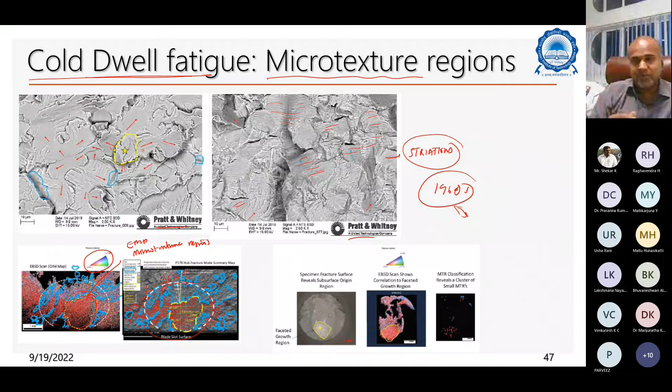The easiest thing is to use these materials in non-critical applications first, and show that they perform better than existing ones, then the trust slowly builds up.

So AM is still a promising and viable manufacturing technique to produce parts, as I said, a very promising technique. Sometimes rapid cooling results in undesirable microstructures, and sometimes defects, which need to be addressed.

That's another important aspect in front of all the engineers and scientists working in additive manufacturing. So it is important to develop a processing map kind of methodology for AM alloys, the way we have done it for wrought alloys. What is the temperature? What is the strain rate at which the material has to be processed to get an optimized microstructure?

Similarly, what kind of laser intensity should be used? What is the powder bed thickness? For this powder bed thickness, what laser should be used? For this alloy, what laser should be used? Those things have to be clearly spelled out. Only then can you say that you have a good understanding about the process, and a better understanding about the microstructure and texture as well.

Texture I didn't stress upon much here because it's a different lecture that needs its own session. There's very little understanding of texture evolution. If somebody is working on texture of AM alloys, there is basically no understanding at all, and not many studies. So everybody is running towards understanding this, and use in critical engineering applications is still elusive. That's the reason we wanted to use it for non-critical applications first, test them, and then move to critical applications.